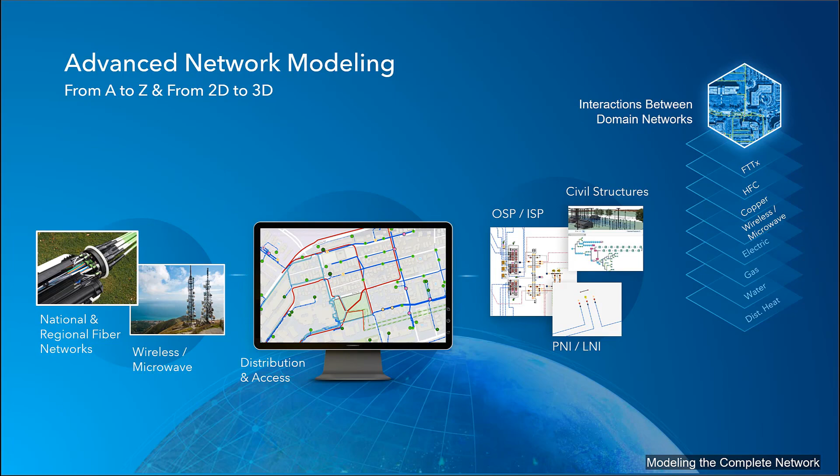In terms of network tier, we studied our users, community, and their use cases, and they guided us to create this data model that covers everything from submarine network to indoor network facilities. We also put in features so we could manage all types of networks within one generic architecture.

And speaking of analytics, Utility Network opens many doors for our users to interact and find patterns from the data. We could run various tracing or create and customize schematic diagrams from the selected features. After we have done a great job on the design, we would love to share that information across the organization.

And that's when the system of engagement capabilities will come in naturally in this scenario. The service-based architecture enables an integrated web GIS platform along with secure REST APIs, providing mapping, analysis, data management, and collaboration with desktop, mobile, and web applications.

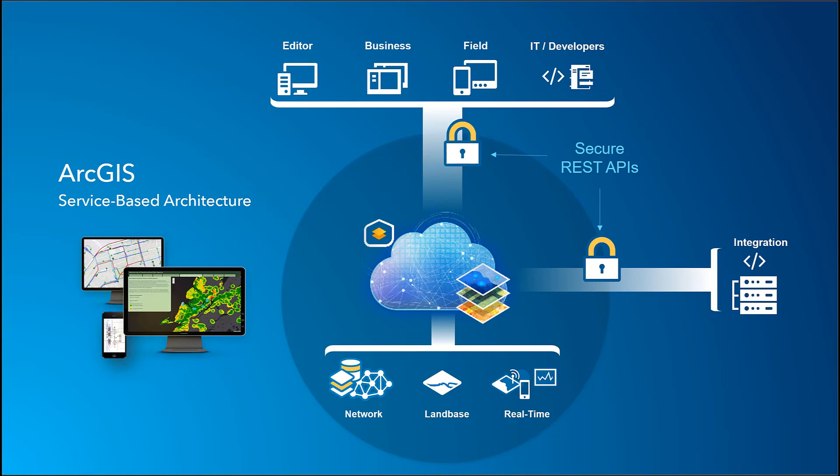As many of you have seen a demo in the early previews, I would love to show you what we are up to regarding the data model and showcase the power of Communications Data Management for ArcGIS Enterprise.

The Communications Data Management for ArcGIS Enterprise is now available from the ArcGIS Solutions site. Users could easily find and deploy the solution directly to your ArcGIS Online organization. Once the deployment is finished, you will find the item and solution package directly from the folder.

Let's click on the solution itself and download the package to your local machine. Once you have downloaded the package, just unzip the file to your local machine. Now you can see all the items within this solution package are ready at your fingertips.

Let's open up the ArcGIS Pro project and take a look at what's inside. Users will find 6 major components within the released solution package, and we highly recommend our users to explore every single one of them for more detail, especially the tasks that will help us go through the entire workflow.

Let's open up the Communications Network Editor map, which provides an editing environment in ArcGIS Pro designed to streamline the creation and attribution of network assets.

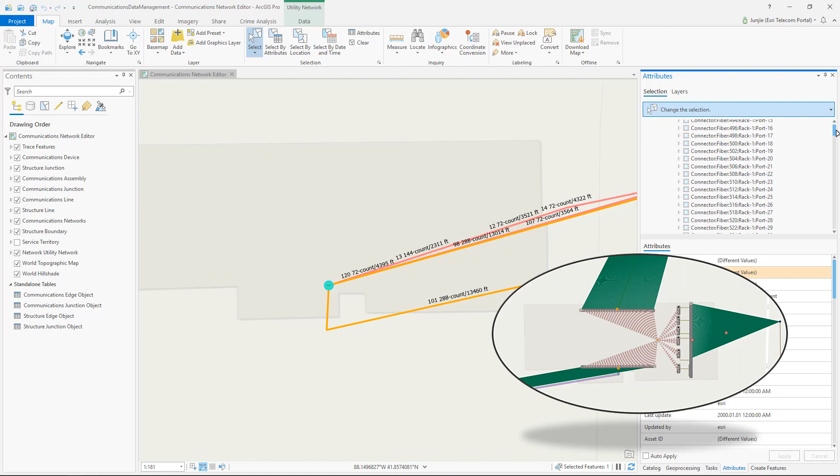Let's take a first look at this regional hub location where we have non-spatial features enabled. The ports, racks, and shelves, previously modeled as spatial features, are now modeled within non-spatial object tables. Let's also take a look at one of the distribution hub locations where we have modeled the equipment with non-spatial objects.

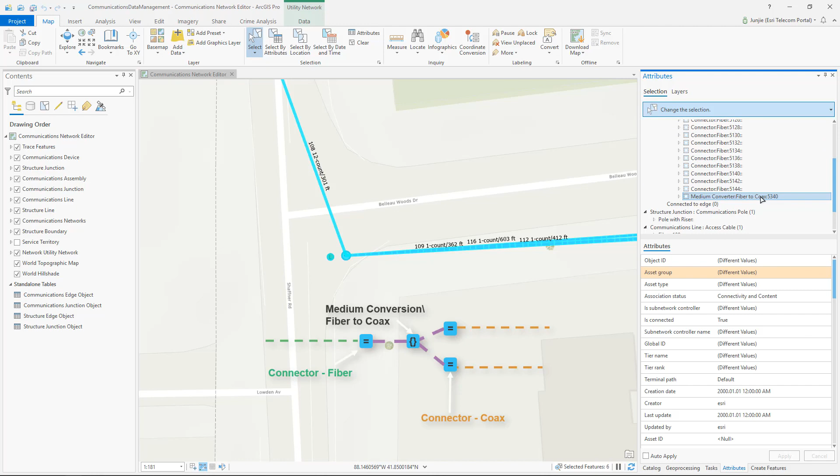In a scenario where we have two types of network medium exchange, both fiber and coax are connected with a medium converter device to bridge the connectivity. Here is a visualization of the equipment modeling for the transition device for the HFC network, and you could also see on both sides of the device there are coax cable and fiber cable.

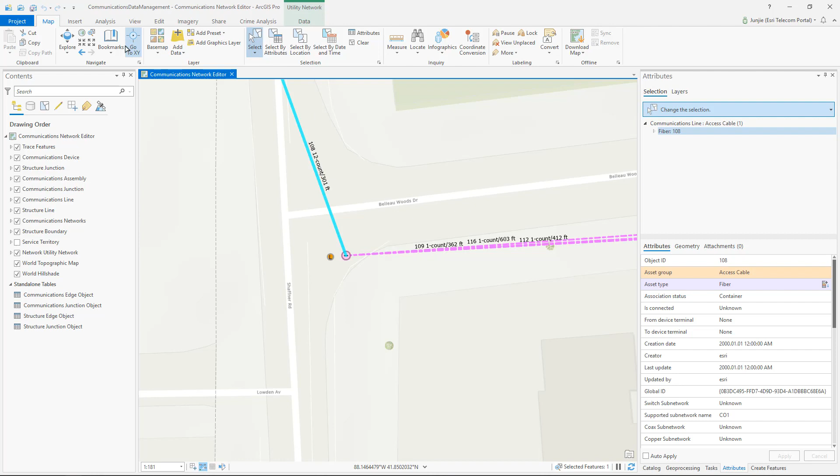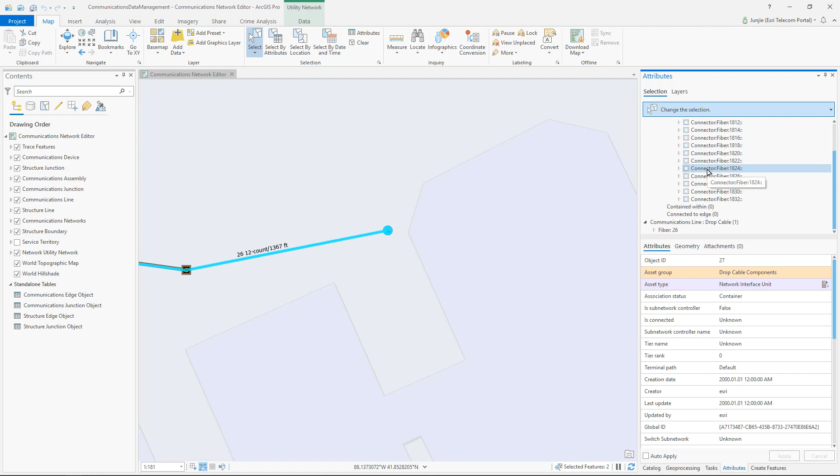Let's take a closer look at a network interface unit for a bigger building. There are multiple strands attached to the ports within the equipment, and they're being modeled as non-spatial objects as well. Let's take a look at our last location, which is the microwave tower.

By clicking on the tower structure itself, it shows the detailed inventory of baseband, radio unit, and antenna in non-spatial objects. Once again, we highly recommend our users take a look at all the bookmarks for the equipment modeling details.

Now it's time for some demonstration of the design process. Let's take a look at this area of interest. We're trying to build a fiber route all the way from the regional hub to this neighborhood.

Let's go over to the editor template, and we can start digitizing some civil structure to support the new telecom network. I will start by placing some handholes along the route and creating trenches between each of them.

I will follow by placing a pole with riser and then creating some aerial span with poles along the route with the group templates.

After we complete the second aerial segment, I can now go back and fix up the trench between the handhole and the pole.

Next, I will proceed to create some vault location with knockouts and also some duct bank in between. First, I will place down a knockout location on the route, and then create an endpoint for where that duct bank will end. Now I'm going to place in 6 of those ducts within the duct bank.

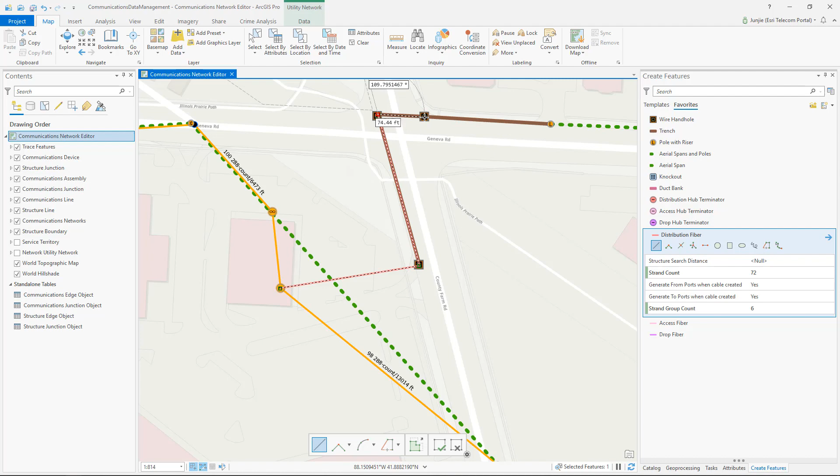Now I'm ready to draw in my distribution fiber. Simply go into the editor template and select 72 strand count fiber with 6 buffer tubes, starting from the regional hub location and adding vertices along the route at every single structure point.

And finally connecting to the distribution hub location. As you can see, the system is processing that editing task, and all this quick editing and automation are assisted by the attribute rules which are created by our solution team.

Now the creation of the fiber cable along with the non-spatial strand has been complete. Let's go back and do a selection on one part of the route.

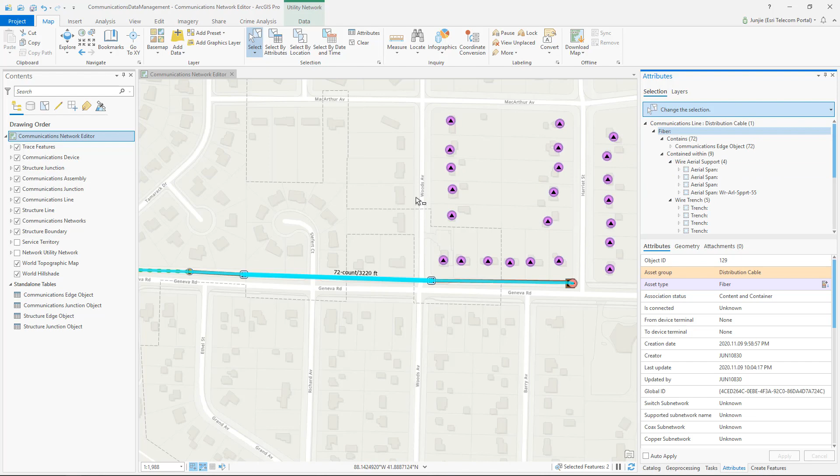We could clearly see all the containment association between the structure route and the fiber route. It passed through one of the ducts within the duct bank and also the aerial spans and trenches. All of this association was created during the cable creation process with the attribute rules.

By repeating this step into the rest of the neighborhood, we can now create the rest of the network with the access cable and drop cable.

Within this release of the non-spatial model, to create connectivity between ports within equipment requires users to take a couple more steps. For example, in this distribution hub location, we have a distribution hub that has 80 ports. 72 of them are from the distribution fiber, and the rest are plugged into an access fiber.

We'll first identify a port that was connecting to the upstream cable. We'll activate it in the Modify Association window. Then we go back and select the hub again and find a port that was connecting to the downstream access cable. By only selecting that specific port, I could now create that junction-to-junction connectivity from the Modify Association tool.

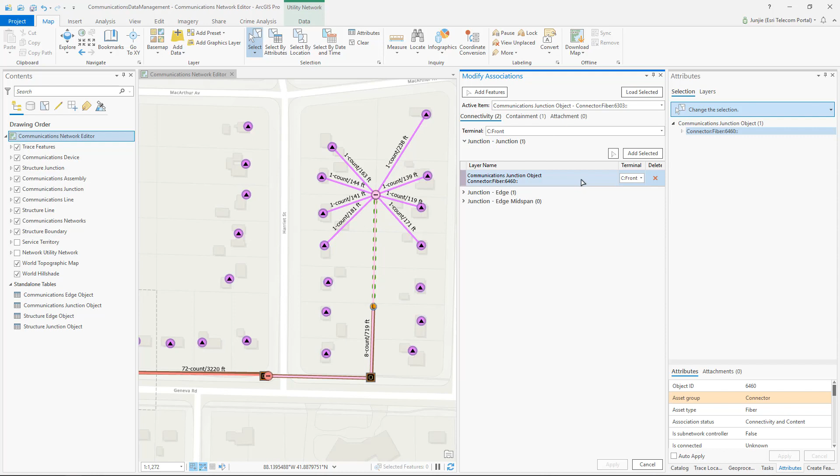This is a space that we're expecting users and partners to come into place and add value to, creating some customized tools to help with the workflow.

Using utility network management can ensure all the design integrity for the network completeness and avoid any human errors. To look at the details, right-click on the utility network layer and expand on the rules. We have built in hundreds of junction-to-junction, junction-to-edge connectivity rules that model just like the actual network itself.

Besides that, in order to increase our design efficiency, we have baked in some fundamental attribute rules within our datasets to help with the design process. Here's where we could see our users and partners come into place and start adding more and more of those attribute rules to help with the design process.

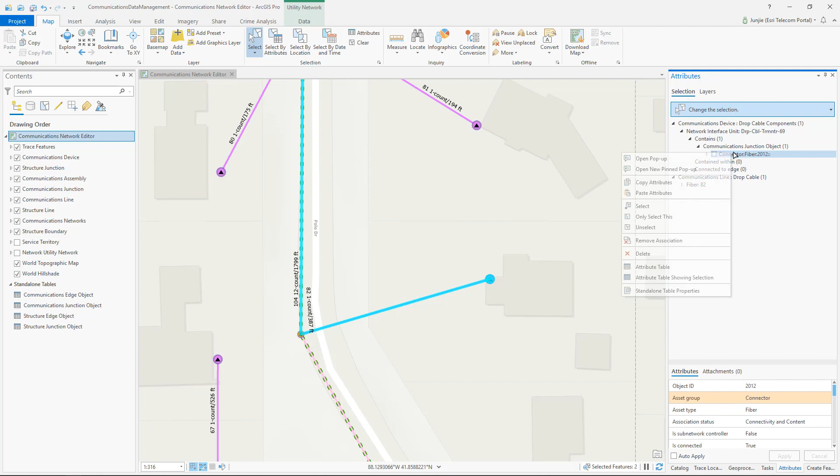Proper network management involves tracing your network to optimize paths for resources to travel. The utility network tracing function provides a framework that could be used to help deliver resources to customers, track the health of the network, and identify deteriorating areas.

In this example, we're going to run an upstream trace from a customer premise. Simply select the network interface unit and expand it to find a port within the non-spatial object and set it as a starting point. By filling up all the parameters and starting the upstream trace, the return result will give us the entire path all the way back to the regional hub location, along with all the structures and communication features along the route.

Besides knowing all the features associated with the customer or business, what else can we do with the tracing result? Let's put them into a schematic diagram. Here's an example where we've run a trace from a hospital location. With all the return features, now we're ready to put it into a schematic diagram.

In order to do that, I'm going to use an out-of-the-box preset basic template. And what I've done is go ahead and add some symbols and labels. Users could configure this layout and share it throughout the rest of the company as a template as well.

There's one cool thing that I really want to show you guys. When I select the portion within the schematic diagram, it brings me back to the actual location in the map. And vice versa, if I select a route on the map, I could indicate it within my schematic diagrams.

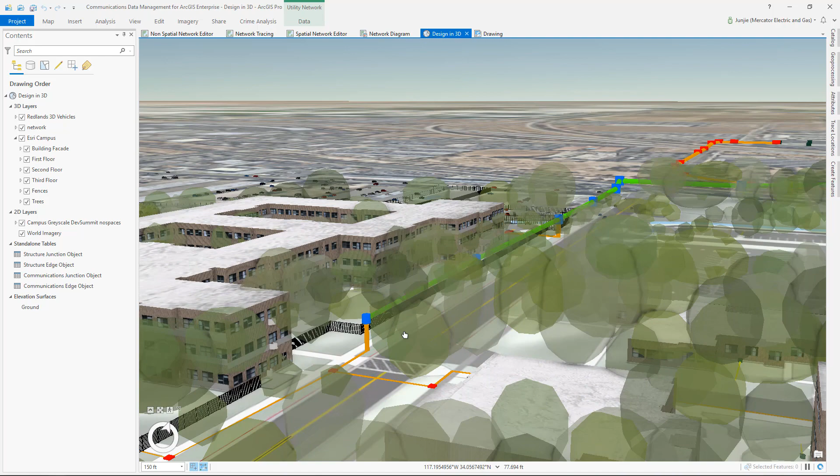So what's in front of us is actually a sample design for the Redlands office. Bringing in this web scene, we could see the building footprint and also the underground portion of the network and the aerial portion of the network.

We can pan and zoom in this scene layer, going through the trees at the street level, looking at the cars coming at us.

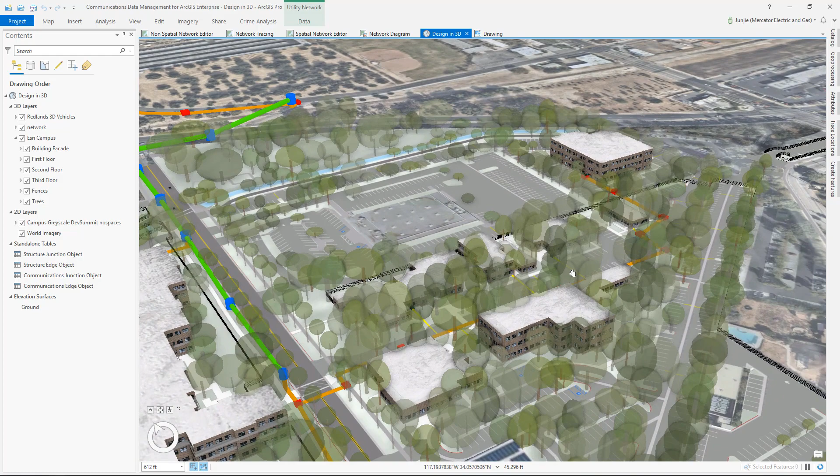But also, if we want to look into an indoor network, it's now ready in this model. I'm zooming into one of the buildings that I sit in. We see this capability opens the door for facility and building indoor network management, especially for urban centers and central business districts.

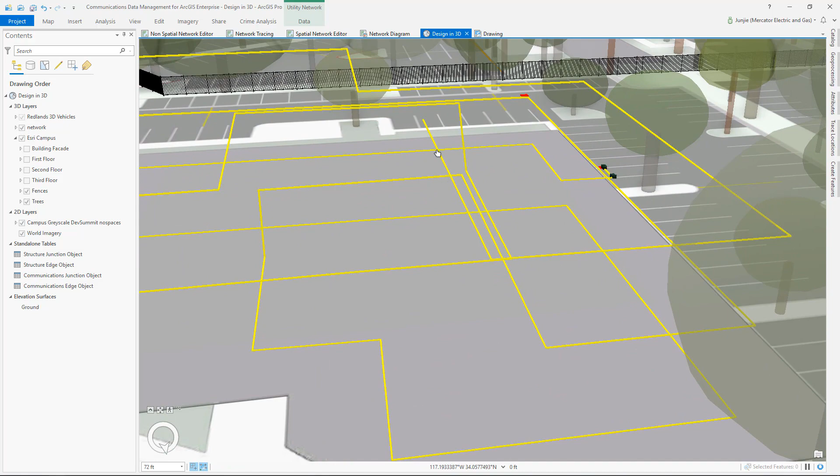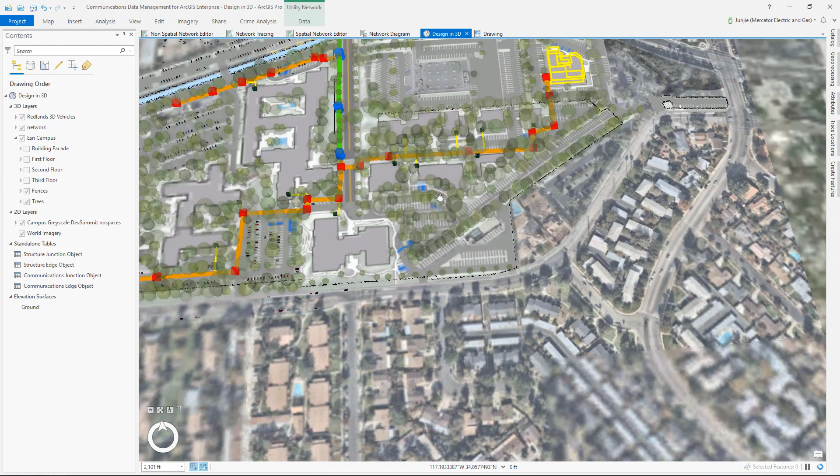This solution, which leverages Esri's powerful ArcGIS utility network management, is going to serve as a foundation for supporting our users and partners in the telecommunication space.

The communications data management for ArcGIS Enterprise is a future-proof enterprise solution that enables modern telecoms to design, manage, and operate the next-generation telecommunication network with unlimited possibilities.

In the future, Esri's telecom solutions are evolving with telecom network technology. As users, you could always find the right and the best solution that fits your need.